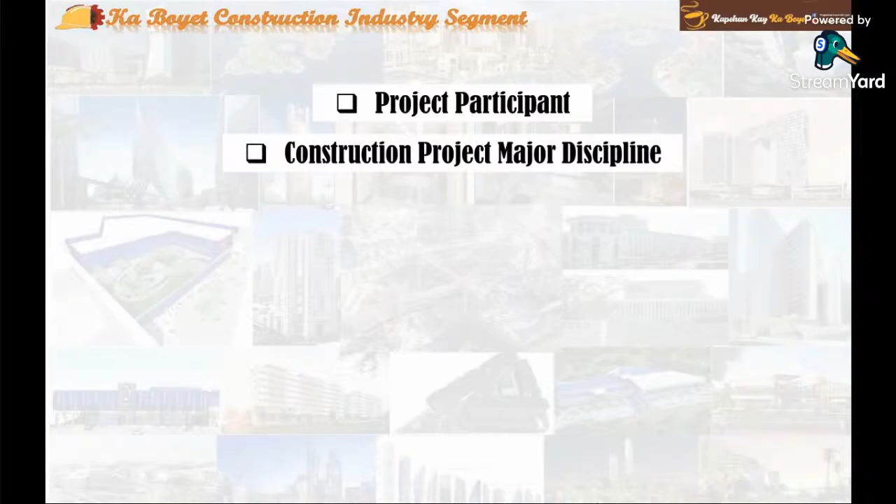Who are the project participants, what are the major disciplines in the construction project, what are the project stages, what are the project work packages, what are the required government permits, certificates, and clearances, a sample of a basic general building project technical organization chart, and lastly, project deliverables.

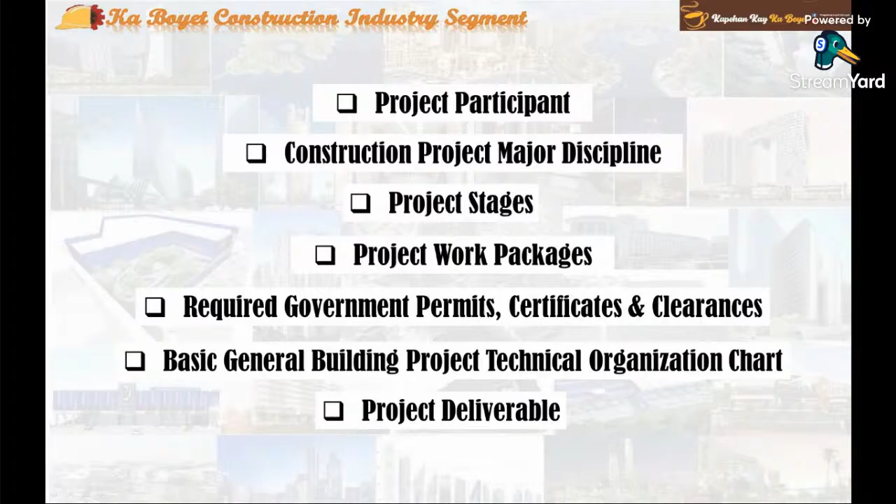Let's start with project participants.

Owner developer is the person or entity, or authorized representative thereof, who signed the contract as an owner.

Architect engineer means the person appointed by the developer and/or owner for the purposes of the contract, and shall head the project management team as the principal representative of the owner.

Project construction management consultant shall mean the entity and/or firm headed by the architect engineer who will be responsible for executing and completing the works, either directly or through properly authorized agents, including without limitation the project manager, architect,

engineers, quantity surveyor, consultants, and other personnel directly reporting to the owner, the respective obligations of whom are set forth in their contract with the owner.

Design consultant is the person or firm duly registered and licensed by the government to prepare the project conceptual, schematic, and detailed architectural and engineering design drawing plans, project specification, project analysis, and calculation.

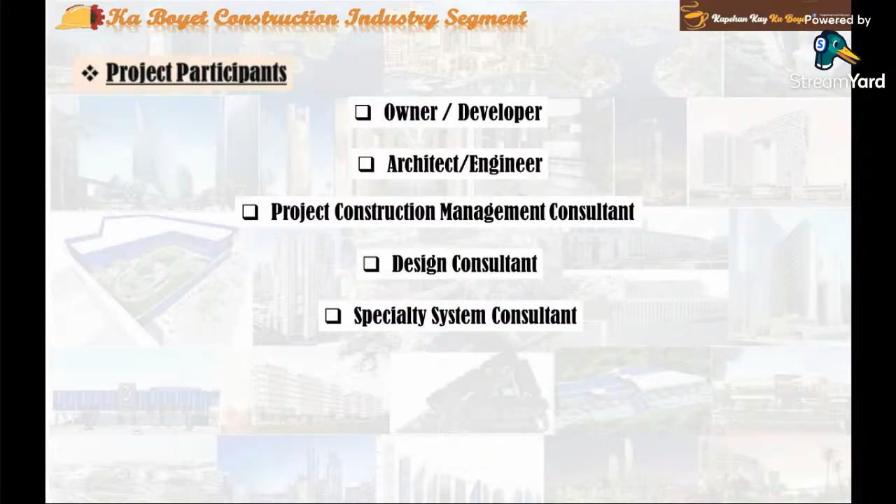A specialty consultant is or are the person or persons or firms duly registered and licensed by the government who specialize on specific project requirements.

Quantity surveying consultant is the person or firm duly registered and licensed by the government who shall provide cost and material estimates, draw up projected budgets, and work alongside the team, noting any design changes and their effect on cost.

And lastly, we have the contractor or fabricator, manufacturer, or supplier, who is the person or firm duly registered and licensed by the government

who has the capability and whose bid proposal has been accepted, and to whom was awarded the contract to execute the work.

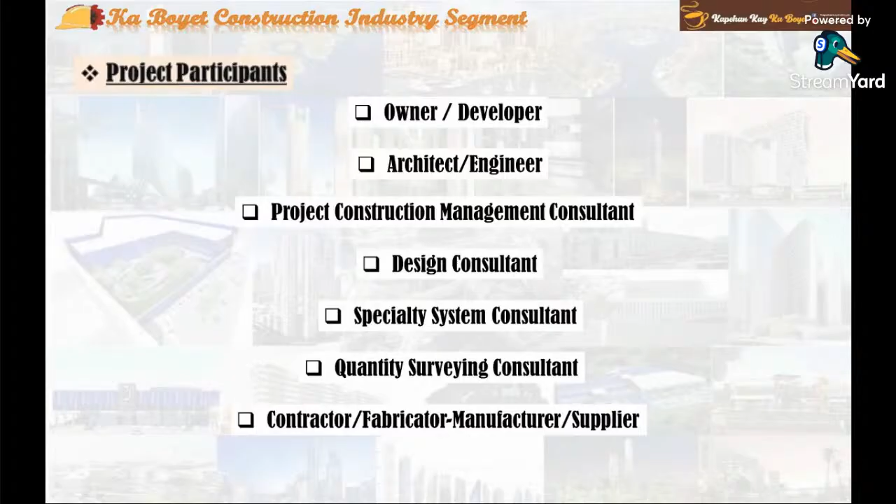Next, what are the construction project major disciplines? You have the civil structural, the architectural, the plumbing sanitary,

fire protection, the electrical and/or low current—by the way, low current here in the Philippines is known as auxiliary—and the mechanical.

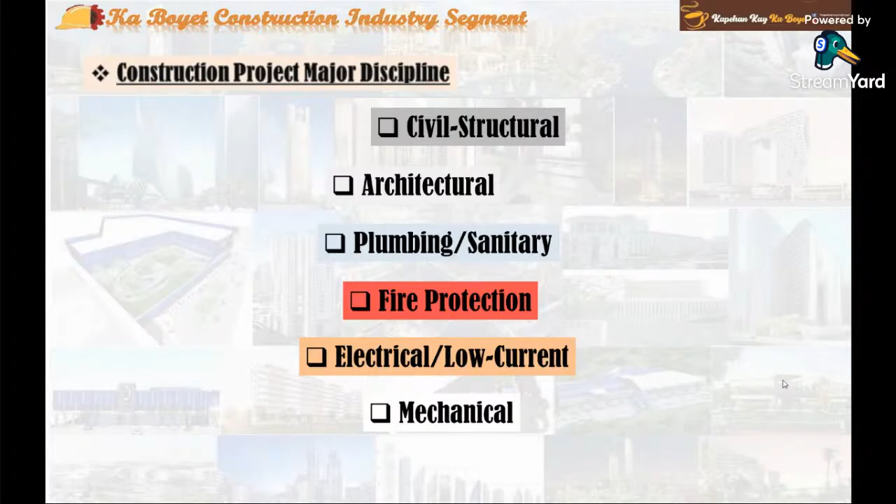Now, what are the project stages? First, you have the design and engineering stage. Next is the tendering and/or procurement stage.

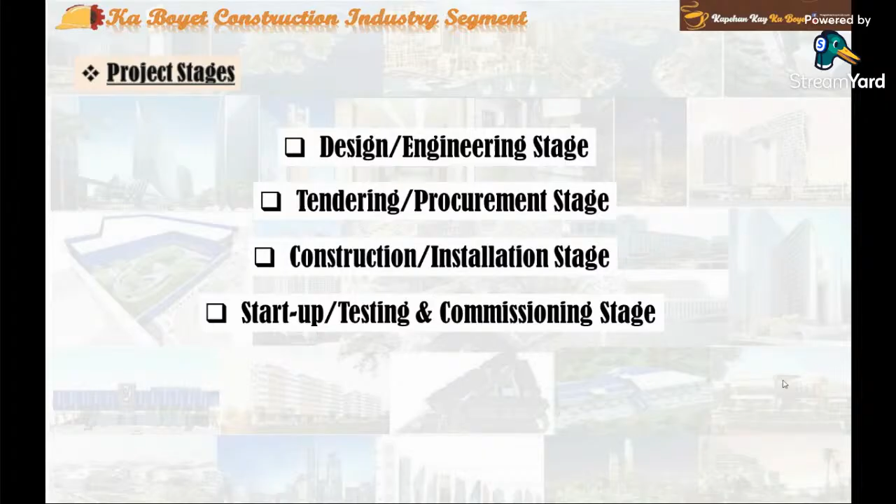Third is the construction and/or installation stage. Fourth, the startup, testing, and commissioning stage. And last, you have the handover or closeout stage.

Now we go to the work packages. The work packages for design consultant are conceptual and schematic design, and detailed architectural and engineering design, which includes architectural

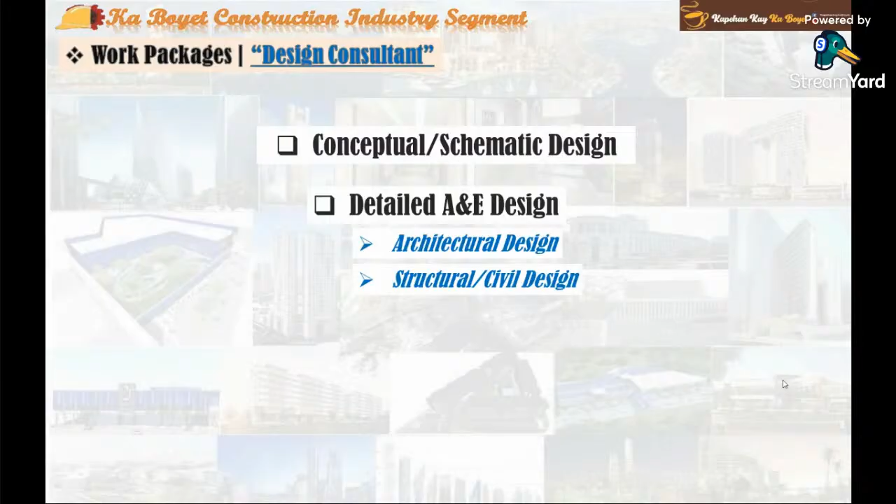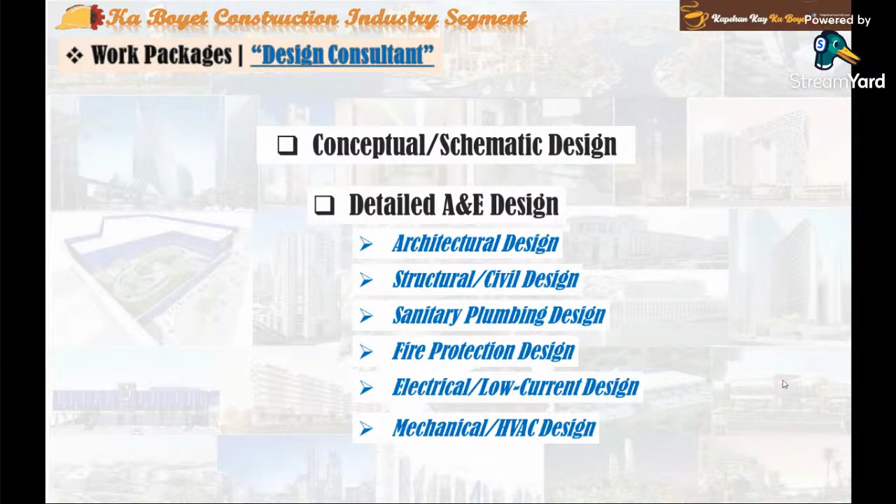design, structural civil design, sanitary plumbing design, fire protection design, electrical low current design, and mechanical HVAC design.

Now let's go to the work packages for general construction works. This includes the general civil structural work package and the general architectural work package. Sometimes these two work packages, in some projects, are combined to be done by only one contractor.

Then you have the general sanitary plumbing work package and the general fire protection work package. Sometimes these two work packages are done by just one contractor in some projects.

Then you have the general mechanical and HVAC work package, which is the heating ventilation air conditioning.

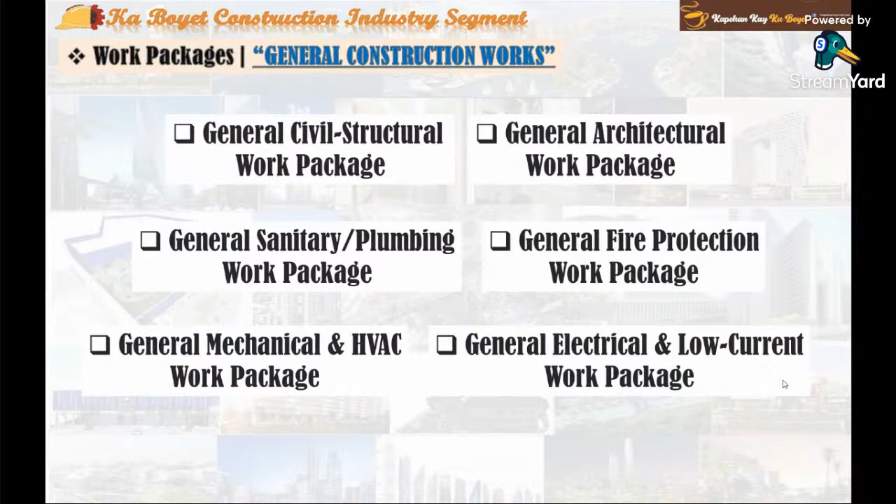Then you have the general electrical and low current work package, and lastly, the general site development work package.

We also have the work packages for specialty works, like the post-tension works work package, the structural steel work package, the EIFS work package,

the landscape or irrigation system work package, the digital signage work package, the STP work package or sewage treatment plant,

the POS system work package, the point of sales—this is for commercial malls—the closed circuit TV and/or security system work package, the fire detection and alarm system work package,

the automated garbage bin system work package, the building structured cabling system work package, the conveyor and lift work package.

This is the escalator, travolator, passenger service elevator, or the dumbwaiters.

Special automatic fire protection system work package—these are the automated fire protection systems,

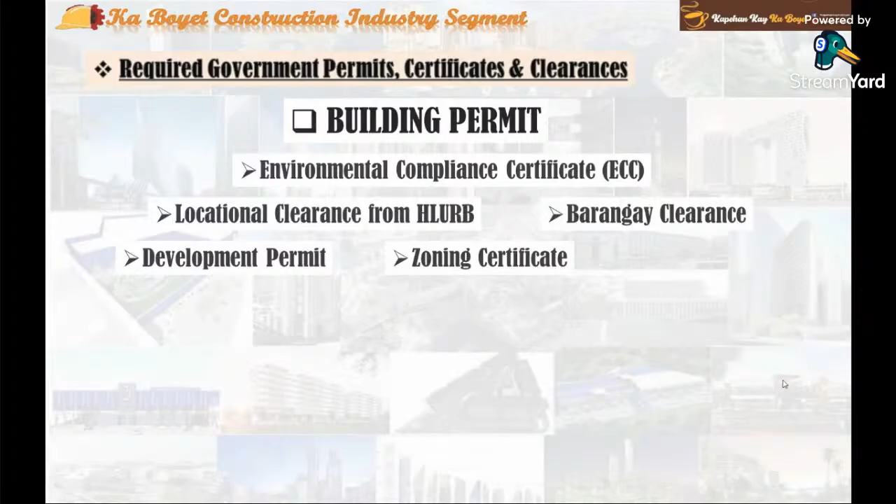certificate, the fire certificate, the fire protection permit, the sanitary plumbing permit, the mechanical permit, and the electrical wiring permit.

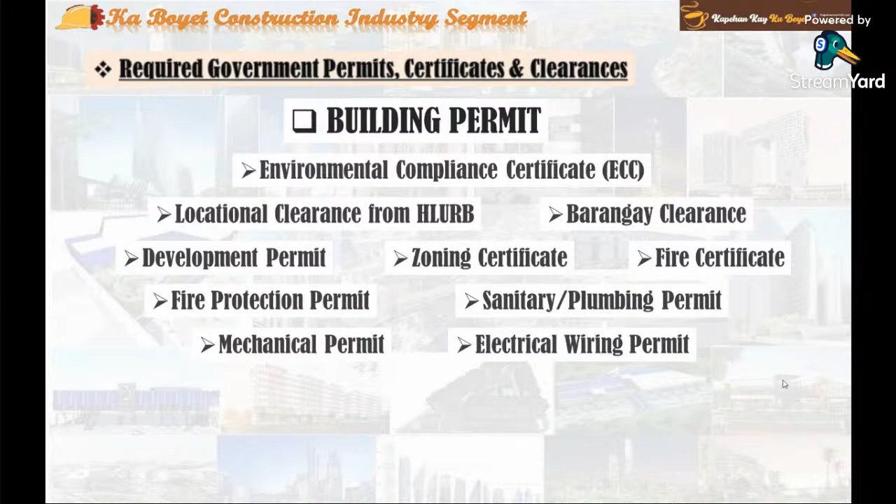Then at the end of the project, you need the building occupancy permit or permit to operate before the building can be occupied or the tenants can

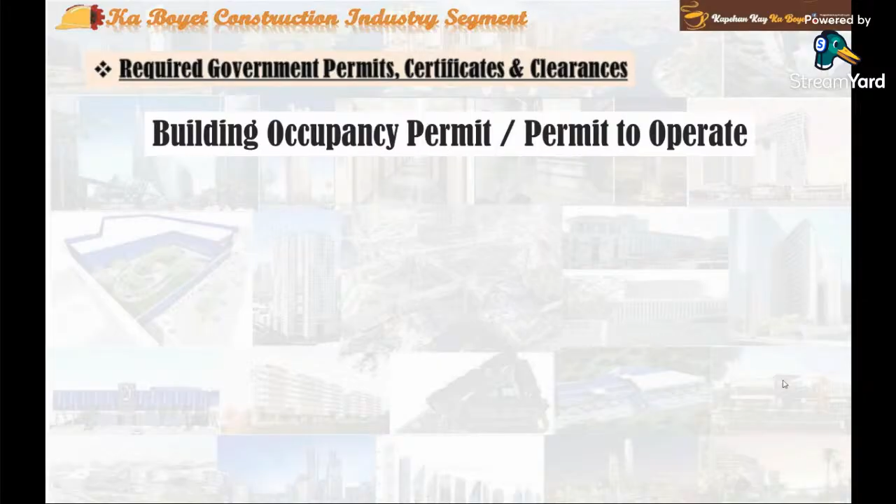occupy the buildings. But before this, the following must be obtained: the final certificates for sanitary plumbing system installation, fire protection system installation, electrical system installation,

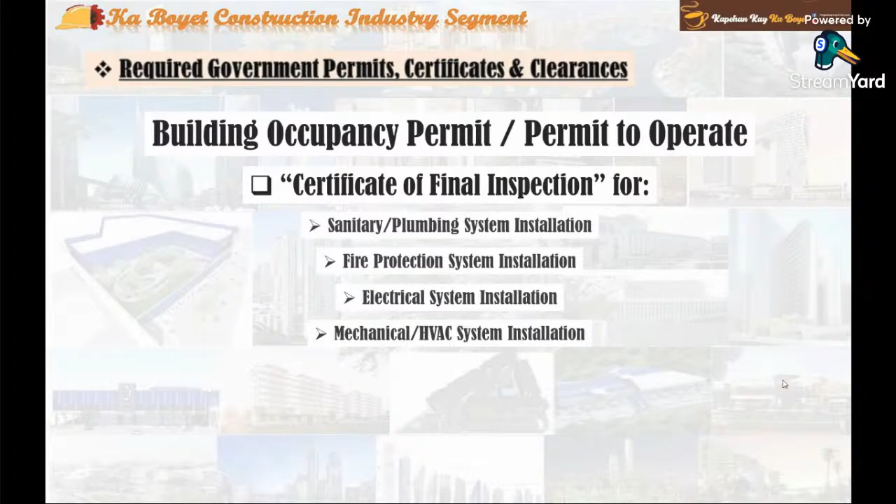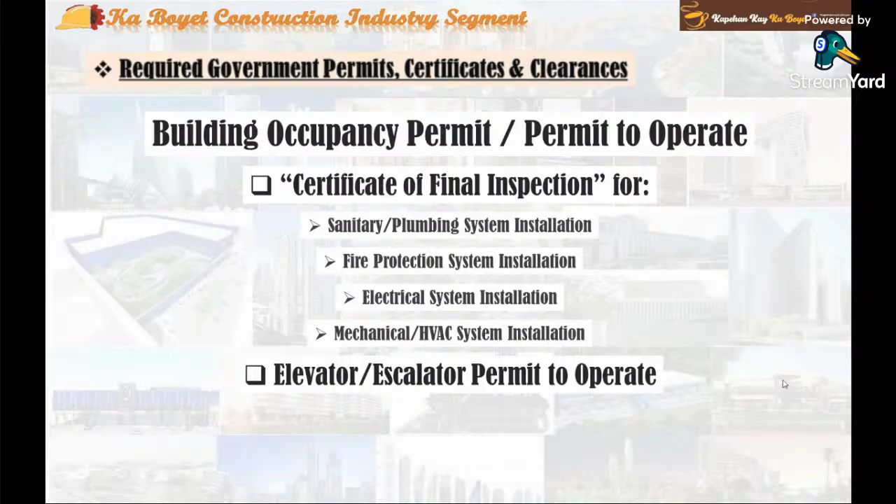the mechanical HVAC system installation, and the elevator escalator permit to operate. So those are the required, basic, important government permits, certificates, and clearances required for the building.

Now let's go. I'll show you a basic general building project technical organization chart. This one, where you have the owner, the specialty consultant, project architect, engineer, the design consultant, the quantity survey consultant, the project construction management consultant, the detailed A&E design consultant, which covers architectural, structural, sanitary, fire protection, mechanical, electrical. And then you have the contractors like the general electromechanical contractor, the general civil structural architectural contractor. You have the specialty work contractors and the owner furnished equipments. These comprise the basic general building project technical organization.

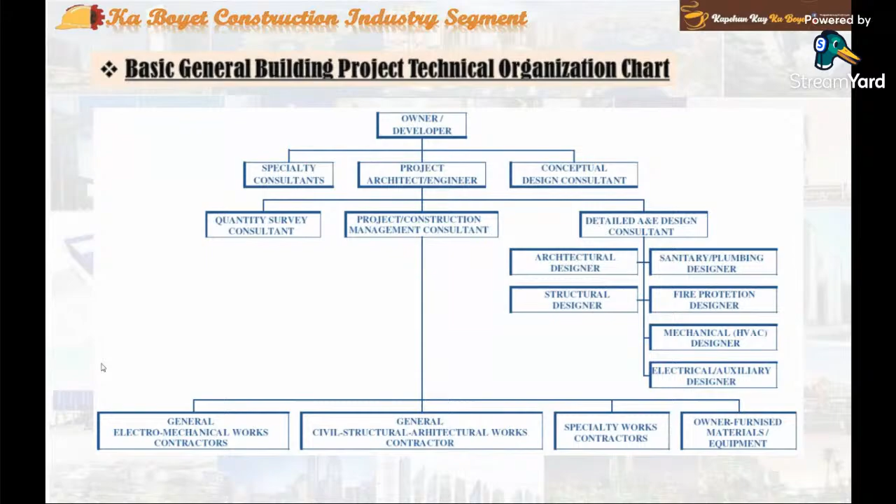Now, let's go to project deliverables. So let's go for the general deliverables. First, you have the business plan. Responsible is the owner or developer. Then the project management plans, which is the project construction management consultant is responsible.

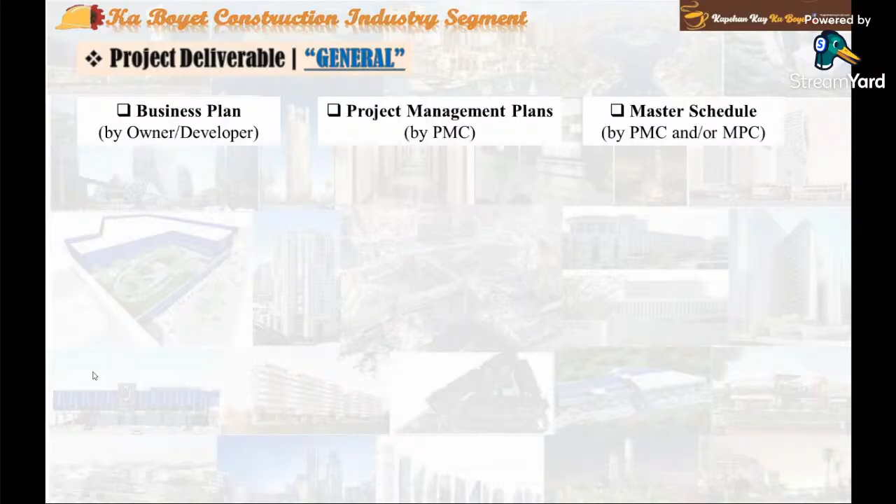The master schedule, it's either the project management consultant and or the master planning consultant. Then you have the cost coding structure, which is either by the project management consultant and or the quantity survey consultant. Plans and procedure by all participants, invoices, all participants, minutes of meeting by all participants, quality assurance by all participants.

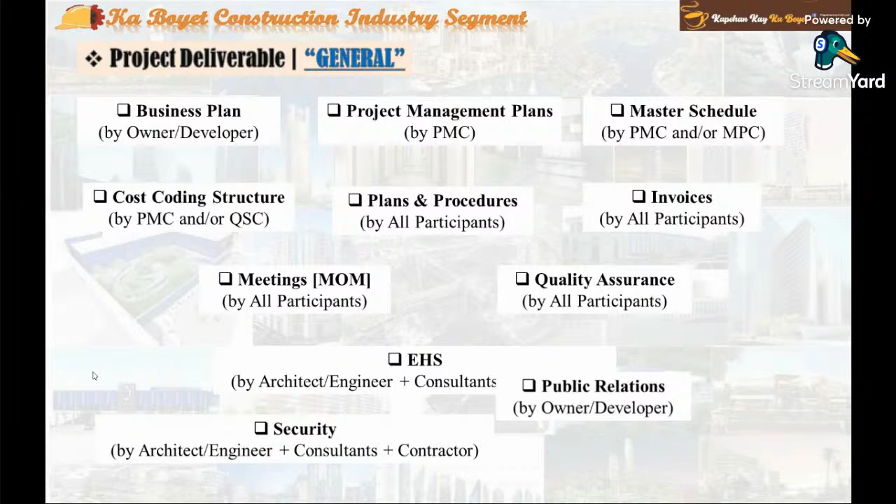Environmental health and safety is a team effort of the architect, engineer, the consultants, and the contractor. Security is also a team effort of the architect, engineer, consultants, and contractor. And lastly, public relation by the owner.

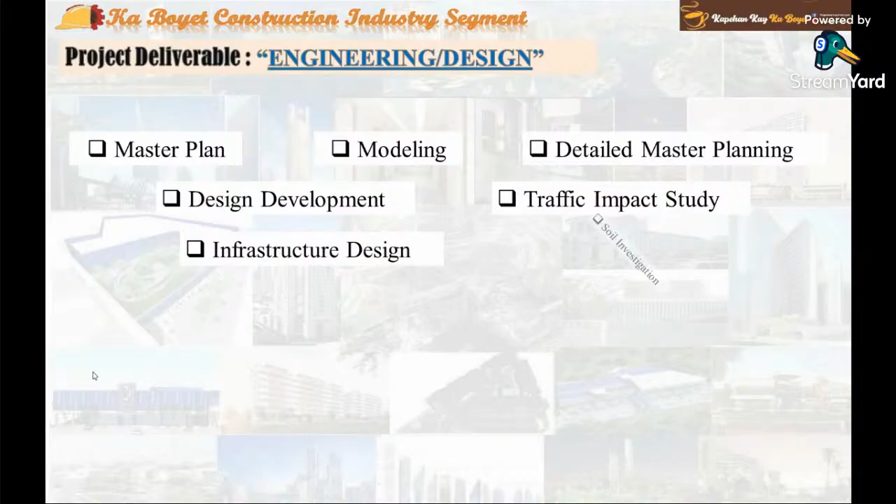Now, let's go to the engineering design. The following are the deliverables. First, you have the master plan, modeling, detailed master planning, design development, traffic impact study, infrastructure design, soil investigation, concept design, topographic survey, schematic design, detailed design development, tender documents and bill of quantities, and shop drawings. But this is to be done by the contractor.

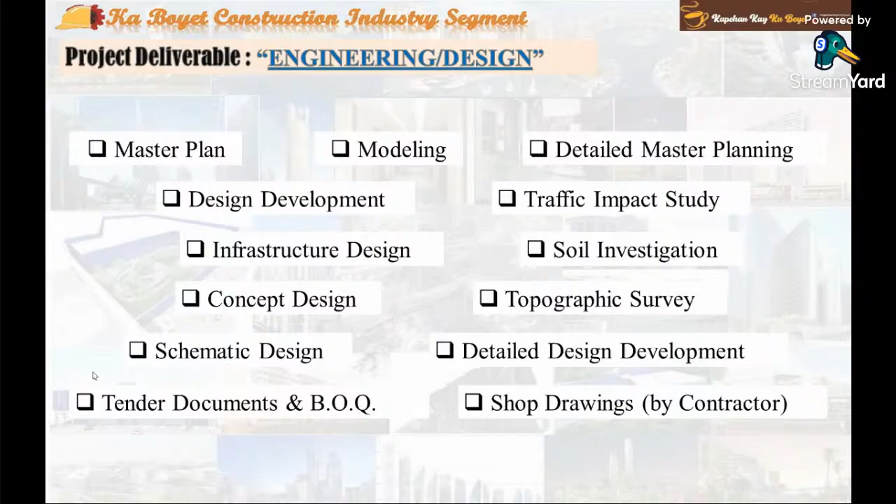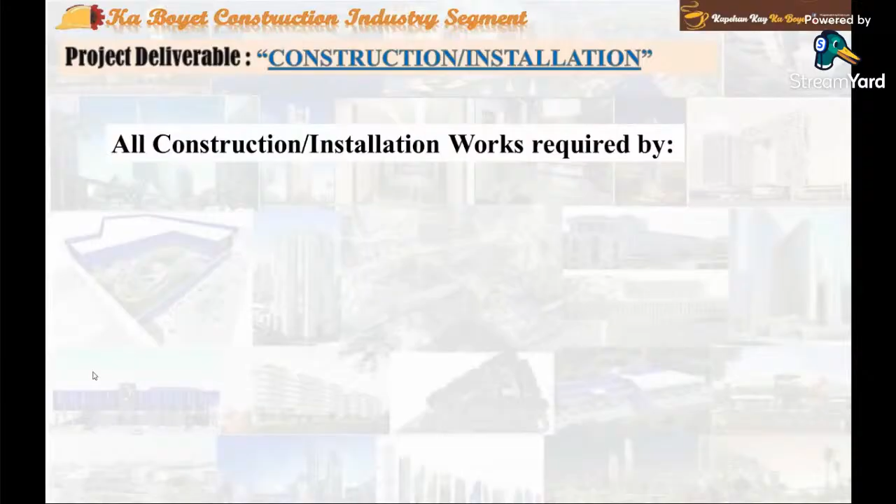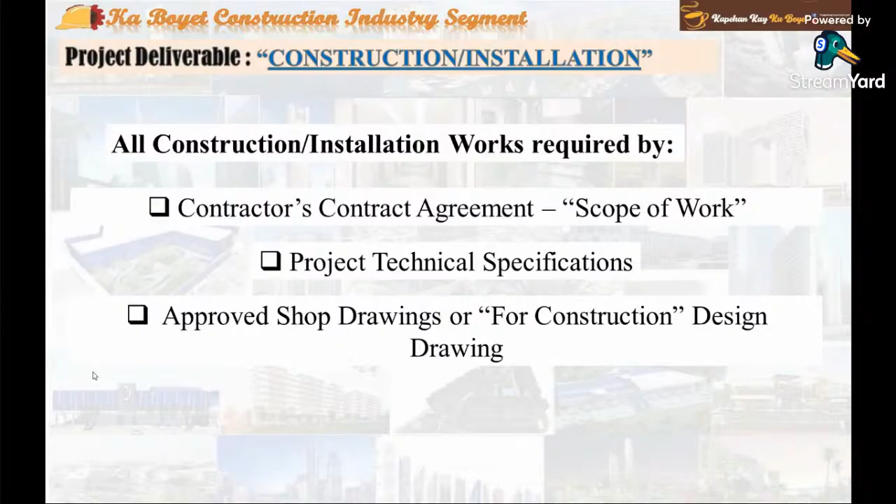Now, for construction and installation, the deliverables are all construction installation works required by the contractor's contract agreement scope of work, the project technical specifications, approved shop drawings, and for construction design drawings, and the contract bill of quantities.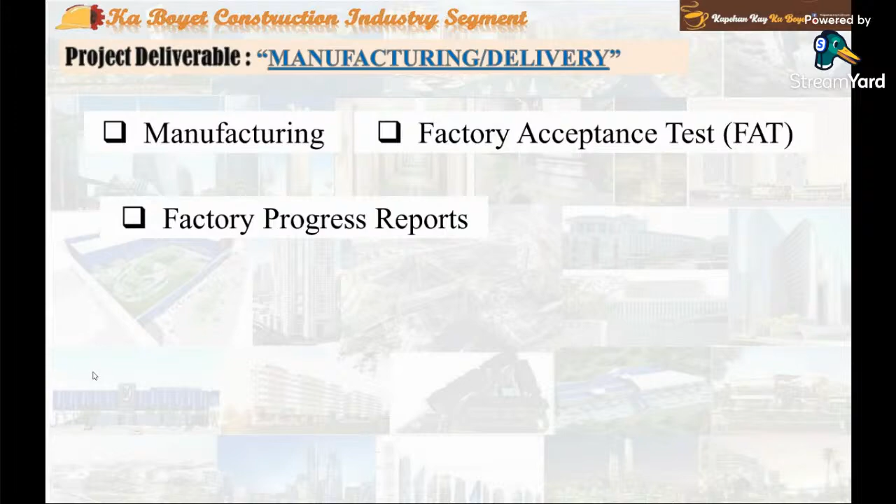For the manufacturing delivery, first you have the manufacturing, definitely. Then the factory acceptance test, or we call it FAT. Then you have the factory progress reports, the ex-factory works, the shipping equipment, delivery, and lastly, storage and handling of equipment.

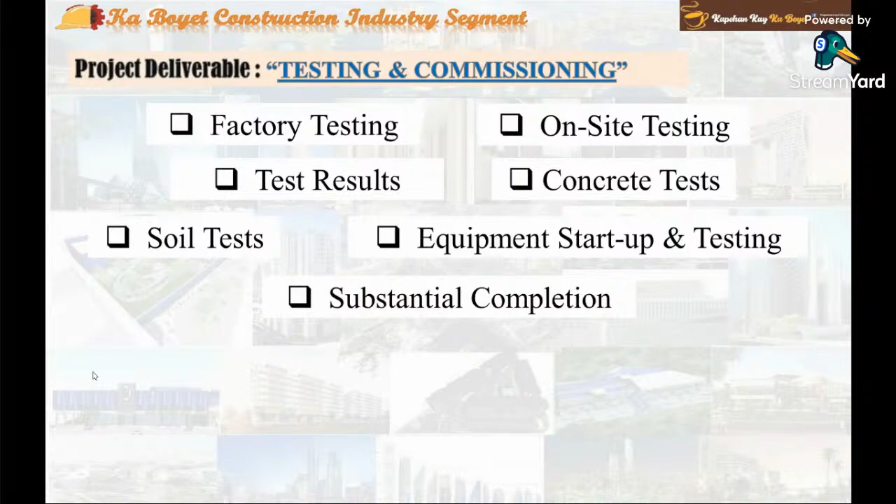Now, for testing and commissioning: factory testing, on-site testing, test results, concrete tests, soil test, equipment startup and testing, substantial completion, snagging and desnagging, and then final completion.

And for the handover closeout project deliverables, you have first the handover procedures and documents and the project closeout documents. And that concludes my general construction project overview.